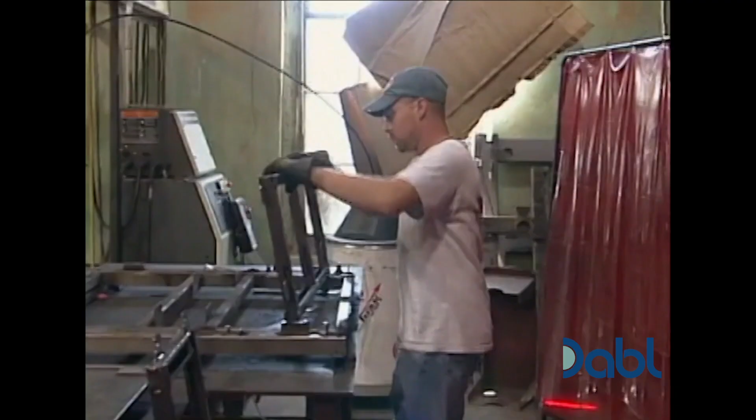Here at Tampa Armature Works, a team of engineers and shipping experts have been converting what are basically really sturdy steel boxes into what they call intermodal steel building units, or ISBUs. Given the urgent need for affordable and storm-resistant housing that can be built in a hurry in places hard hit by hurricanes and earthquakes, it makes a lot of sense to find a way to adapt ISBUs for residential use.

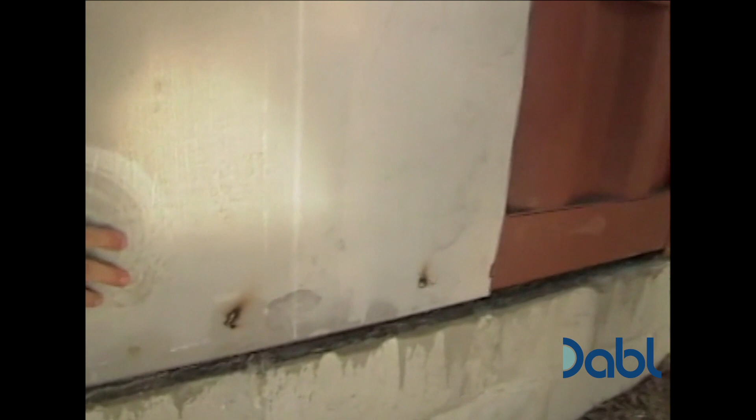All right, so Dave, it still looks to all the world like a shipping container with these kind of corrugated steel sides. What can we do to make it look a little bit more like a house? Well, what we're going to do is add this heavier gauge steel to bring everything out into plane, and then on top of that, we're going to add this sheet metal covering, which brings us in line with the foundation. Okay, so now you've added another layer of steel. Yes, sir. Seems to me that's going to help it cook in there. Isn't it going to get a lot hotter?

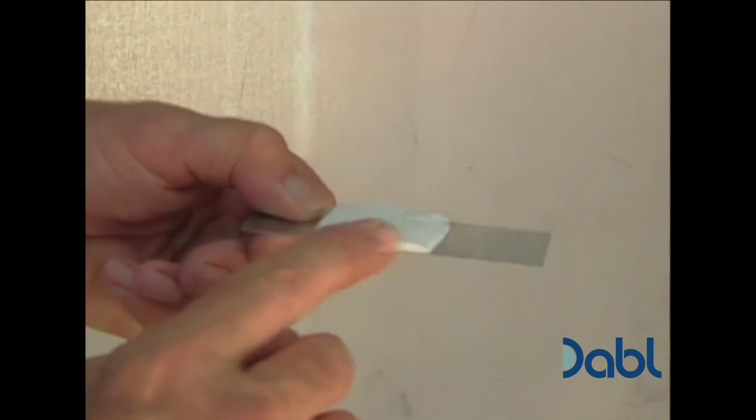One would think, but this is going to be top coated with the Supertherm ceramic insulation. And here's a sample for you. Supertherm ceramic insulation. Well, when I hear the buzzword ceramic, it makes me think of the space shuttle. NASA participated in helping the manufacturer come up with a product that uses 4 ceramics to help deflect and reflect the energy that comes in from the sun. It basically sends energy back from whence it came. So there won't be any insulation on the inside other than the Supertherm.

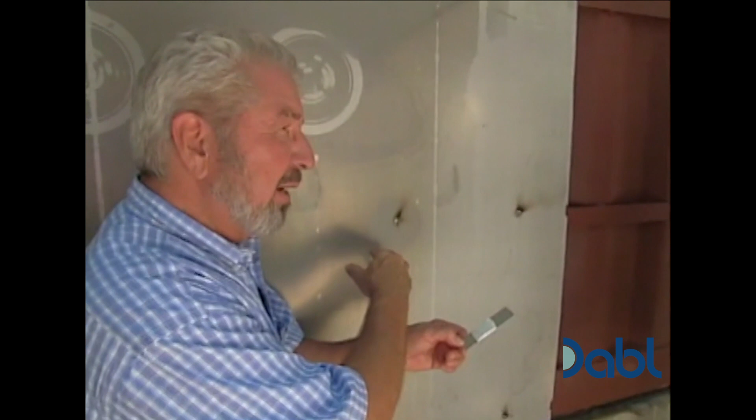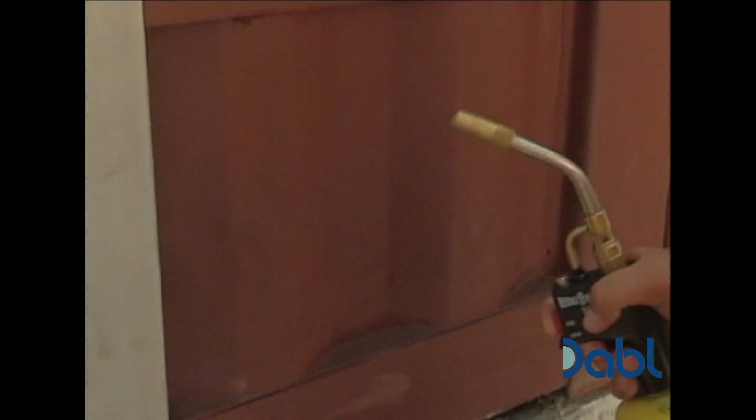And I'd like to show you, instead of just talking about it. So it doesn't get painted on? Or, oh, you've got a demonstration. Yes, sir. All right. And we'll turn that on. Let me get away from your torch here. There you go. And I want to heat that up nice and red hot for you. I'd like you to see that I'm holding it in my bare hands. Wow. And there's absolutely no transfer of heat from that to the other side of this piece of metal. Right there, if you feel, go ahead and hold it. No, absolutely. It's absolutely totally cold, and I'm not going to touch it there.

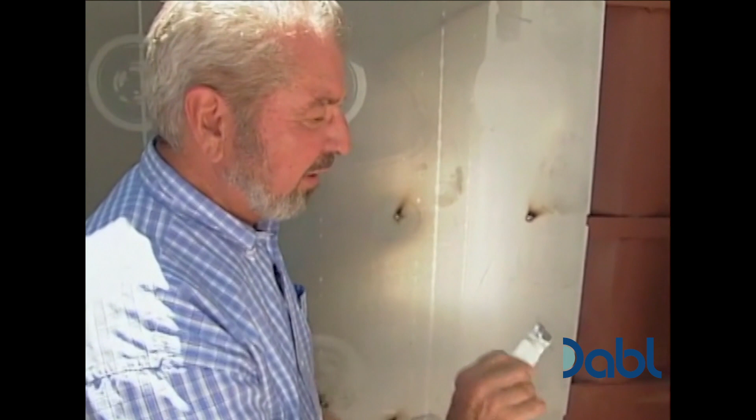That's correct. All right, so how do you install this? This will be sprayed on like any other coating product that you'd use out in the field. And they're ready to start doing it right behind us? Yes, they are.

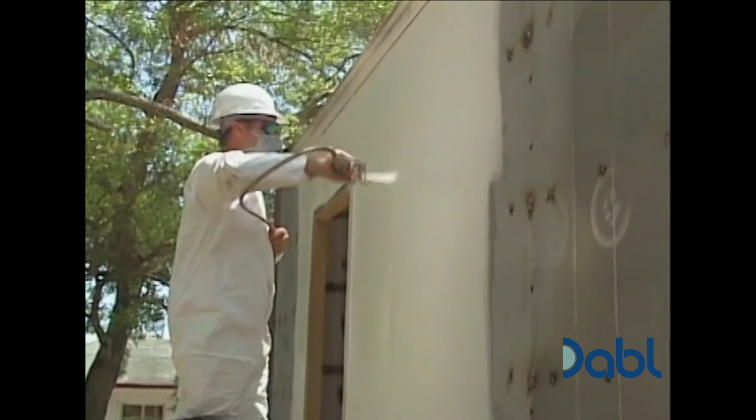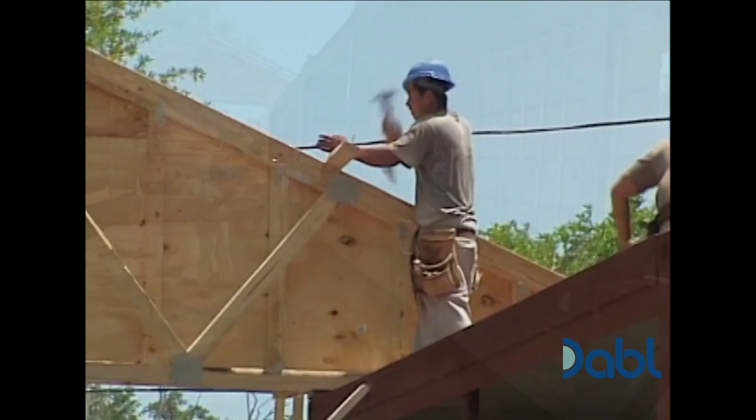All right, we're back on the inside with Ray, our project manager. And what's the front to back dimension on the house? 58 feet. 58 feet. So this is going to be a pretty good sized house. Yes, 1,800 square feet. And we've got plans here so that we can look a little bit at how it's being built, right? Yes. This is the floor framing plan. Can you explain that to us? Yes, what we have is 4 ISBUs, 2 on either side at different lengths. And then we've been walking in the void in between them.

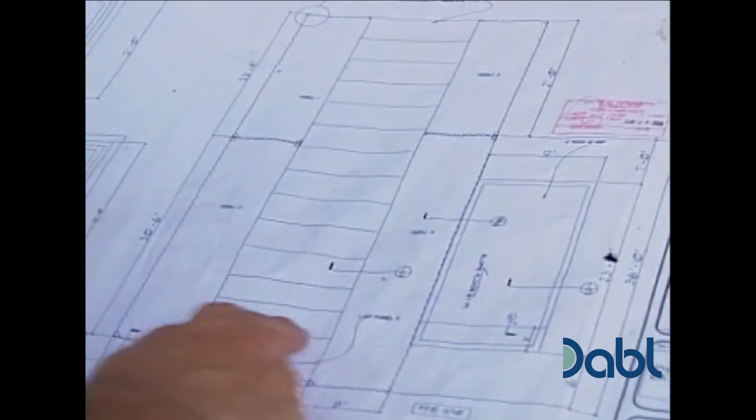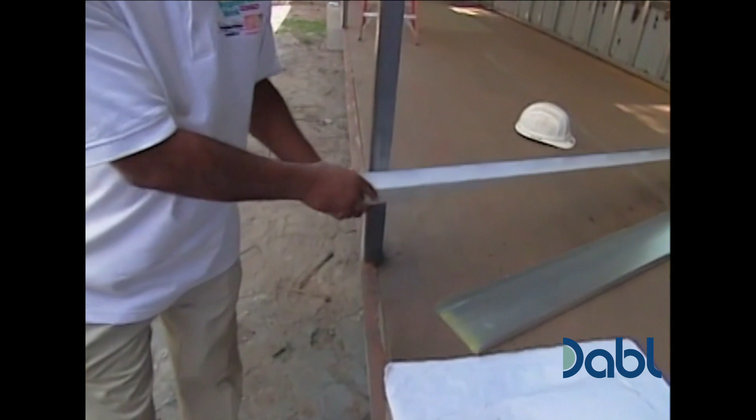That's correct. And what do these lines represent? These lines represent steel joists for the floor system. The joists will be welded between each ISBU, and they'll be similar to this. And there will be roughly 16 gauge steel, 7 3/4 width. And how are they spaced? They're on 16-inch centers. Okay, so essentially you've got a total steel structure, and on top of that you put plywood? That's correct, 5/8-inch plywood.

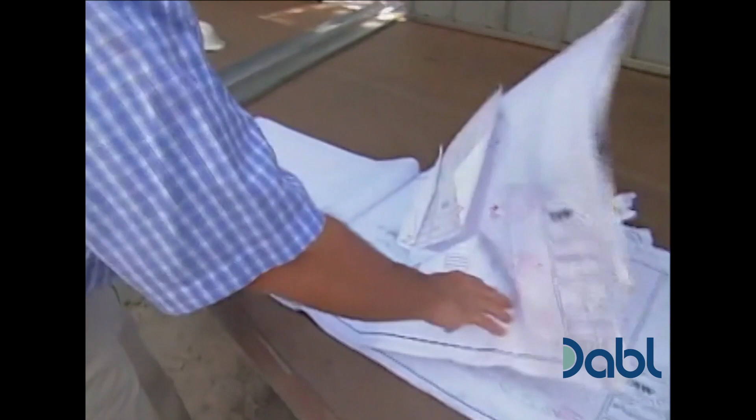Okay, let me see if we can find the actual layout for the house. All right, take us through. I guess this is the front entry over here. Yeah, this is the front entry. It's facing north, and where we're standing here now is in the kitchen area, which is here. This corner. This corner here. There's a garage, that's right. Single-car garage next to it. And that is not made out of a container. That's made out of concrete block and a slab.

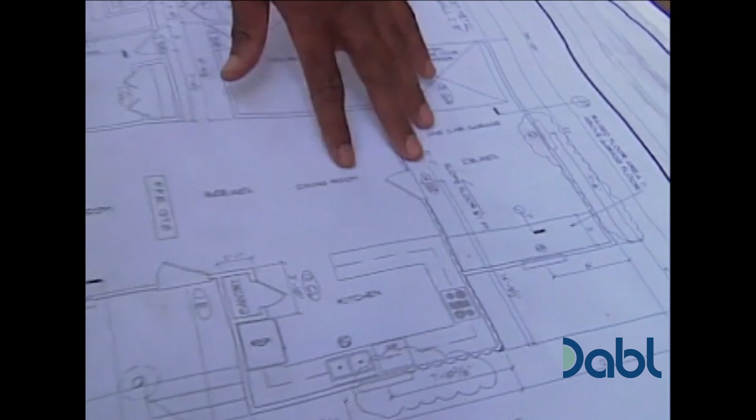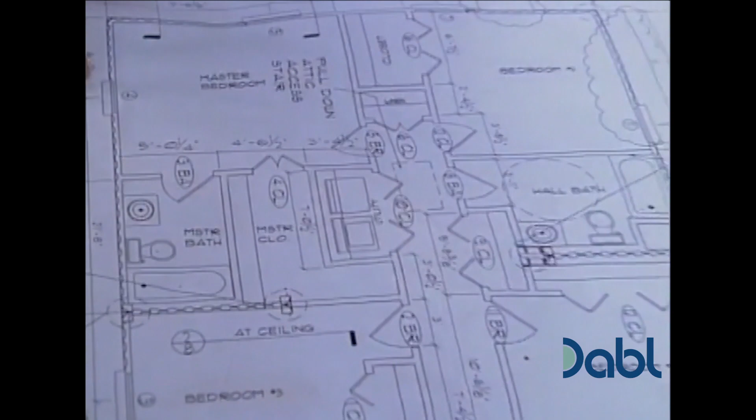That's correct. Okay. And the home basically has a living room, dining area that covers this entire area here. Yeah, so it's like a great room. Correct. And then we have a hallway that goes down the middle of the home, all the way to the back. And on this side, we have 2 bedrooms with a bath in between. On the other side, we have 2 bedrooms. We have a bath here. It's a master bath for the master bedroom. Okay, and a big walk-in closet. A big walk-in closet, utility room, which gives the home a very nice layout. All right, so it's going to have really a traditional kind of floor plan, a nice Florida family house.

What about the outside of the house? Will it blend in with the neighborhood? Yeah, this particular home will look just like a typical Florida stucco home. In fact, we built this home a year and a half ago, about a block away, so it'll look identical to that except it's larger. Terrific. Thanks, Ray.